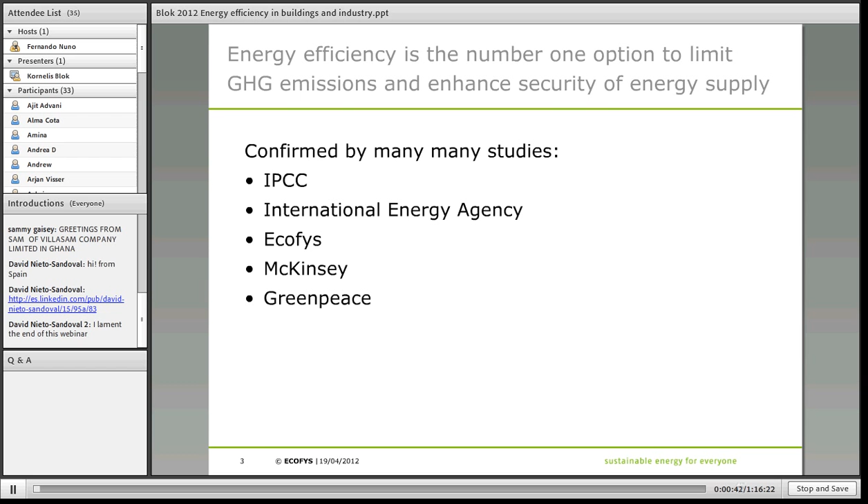If you are interested in energy efficiency in developing countries or energy efficiency in general, this is really a big topic. I cannot stop saying that energy efficiency is really the number one option to limit greenhouse gas emissions and enhance the security of our energy supply. That is confirmed by many, many studies.

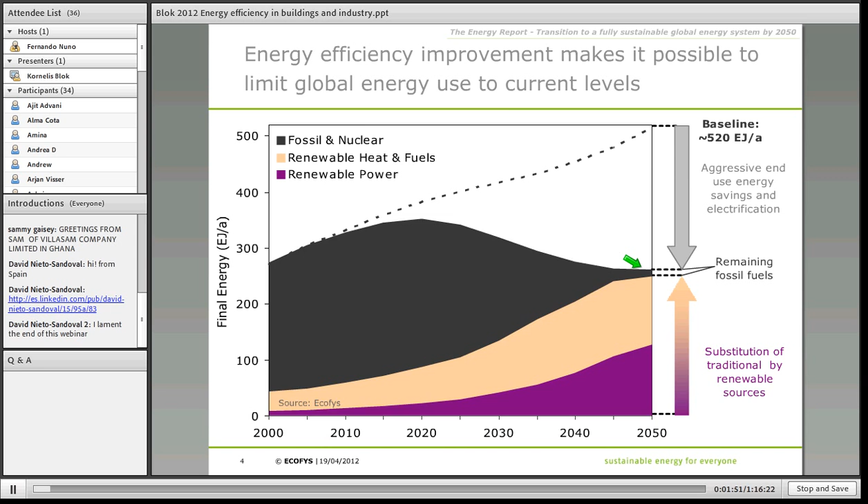But energy efficiency, although it is very attractive and everyone says it is attractive and the number one option, it does not come automatically.

A lot needs to be done to get it happening. In all the sessions that we had, a lot was already talked about what governments, what programs can do. Today I'll focus on the specific situation of companies around the world with an emphasis on developing countries, and I will discuss a number of topics.

First I will move into how we define energy efficiency. I will move to the topic of benchmarking, and at the same time present how energy efficiency is, or what the status of energy efficiency is, in different parts of the world. I will give an overview of energy use in industry and buildings, and then come to the main topics: energy audits and energy management.

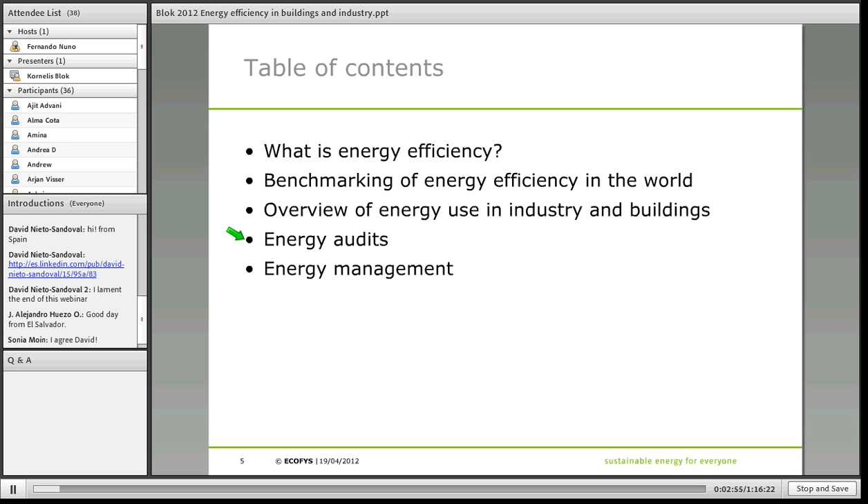So how do we measure energy efficiency? That's basically a very simple way, different from how you measure energy efficiency of a power plant or a boiler, where you measure energy efficiency by dividing output by input. Here you do it the other way around. When it comes to end uses, for instance in industry and buildings, we divide input by output. So we normally measure energy efficiency actually as the inverse of energy efficiency, and we call that specific energy consumption, which is the energy use per unit of activity.

That can, for instance, be expressed in megajoules per ton of steel, megajoules per square meter of office area, or megajoules per vehicle kilometer.

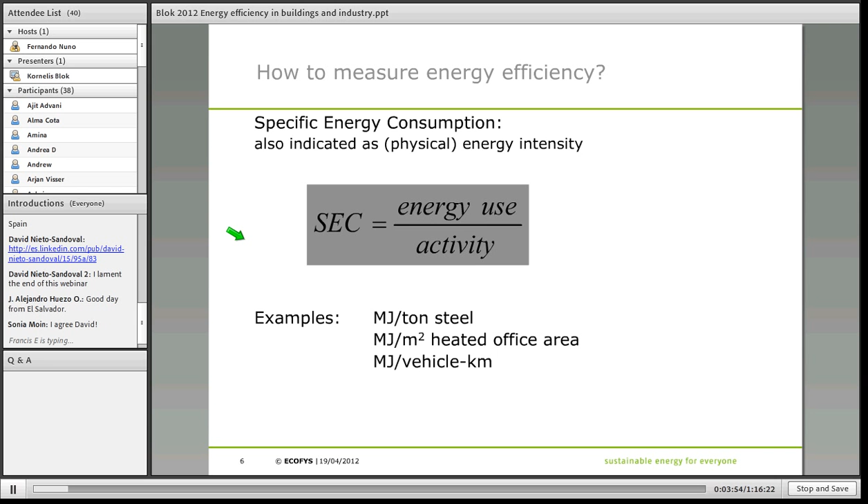Sometimes it's more complicated. For instance, if you have a fridge, you can measure its energy consumption in kilowatt hours used per liter per year. But if you have a fridge-freezer combination, it's more complicated, because it wouldn't make sense to measure energy consumption as kilowatt hours per liter, since that would depend very much on how much fridge compartment there is and how much freezer compartment there is.

So in this case we apply a weighting, and we say the volume is the refrigerator compartment plus 2.1 times the freezer compartment. That's the formula that was used in the European Union. But you can imagine that you can do that in many cases.

For instance, a company could make different types of steel: cold rolled steel and hot rolled steel. For cold rolled steel, you need more energy than for hot rolled steel. So then we use such a weighting system, and we call that the energy efficiency index.

The energy efficiency index is very much the same as specific energy consumption, but we use it in the case where there is a mix of different products or a mix of different activities. We do not care whether that's a mix of fridge and freezer compartment or hot rolled and cold rolled steel.

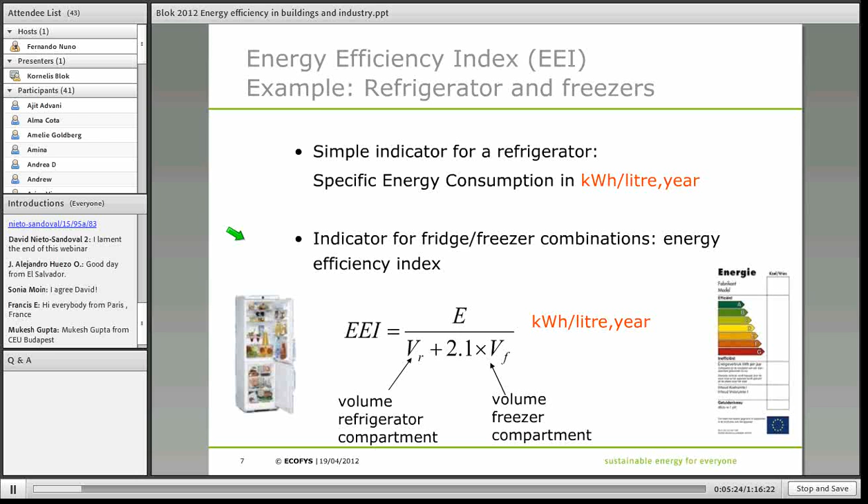What is then energy efficiency improvement? That's simply following up on the previous formula: reducing the energy use per unit of activity.

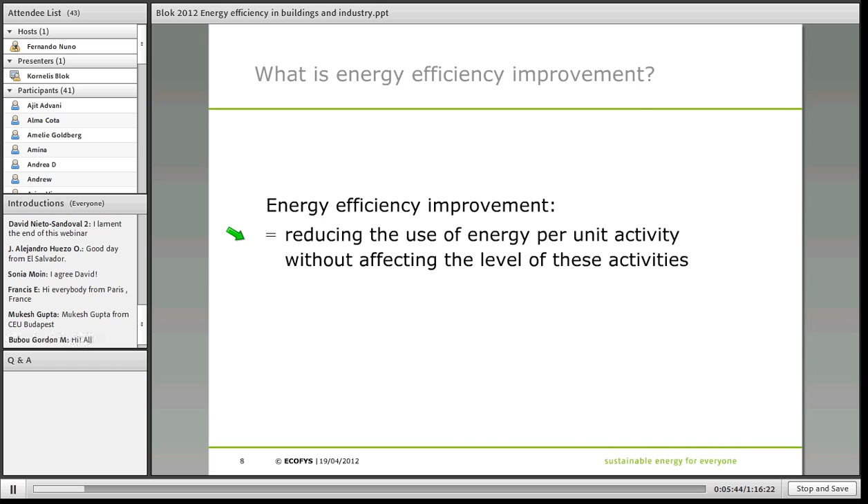One thing I always want to stress is that energy efficiency is not something new, invented 30 or 40 years ago during the first oil crisis. It has been with us for a long time already. This is the specific energy consumption for making iron in blast furnaces. 200 years ago we used 300 megajoules per kilogram of iron, and now that has dropped to about 12 megajoules per kilogram of iron. So you see a dramatic improvement in energy efficiency, measured as a reduction in specific energy consumption.

But the question on the table is: we see this automatic, autonomous improvement, as we often call it, of typically 1% per year. Can we speed it up? Can we go to 2, 3, or maybe even 4% per year?

So far for the definitions of energy use and energy efficiency. I will now move to the next topic: where is energy used for? I said we will look at two sectors, industry and buildings, more specifically service sector buildings. What do they use their energy for?

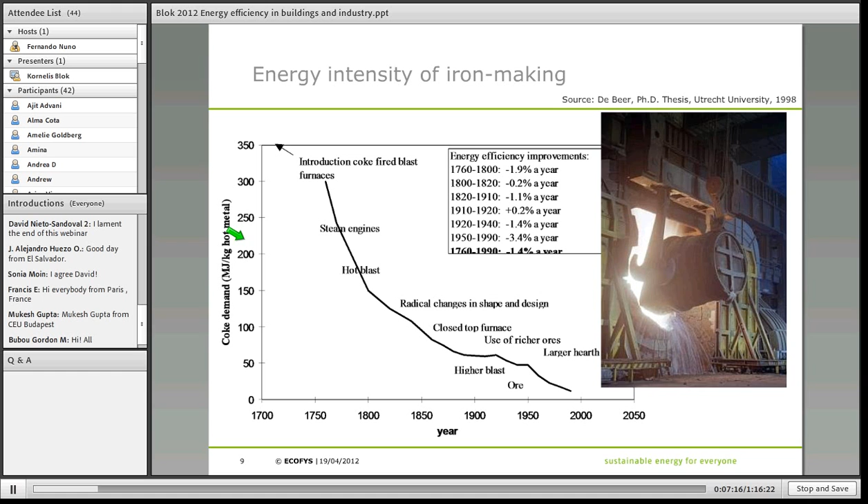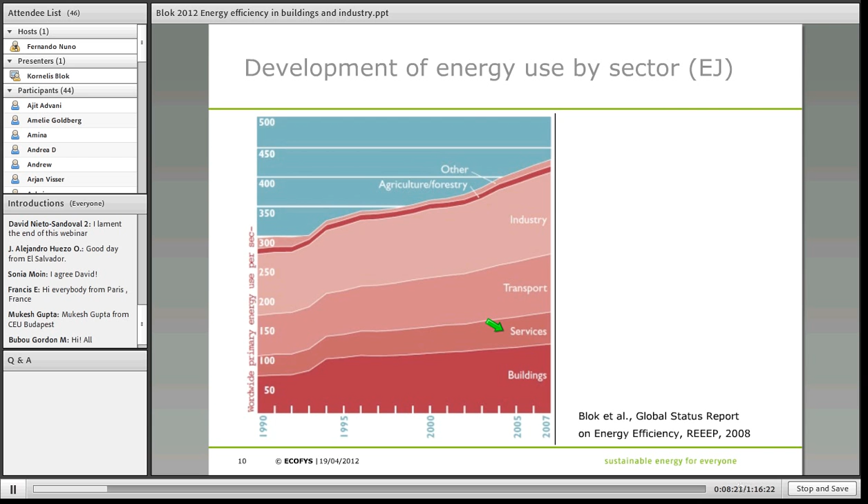So we look at these sectors, services and industry. Let's go a little further into the industrial sector. In this picture you see the breakdown of energy use in the industrial sector for both OECD and non-OECD countries. For industry, non-OECD countries already use quite a bit more than OECD countries.

For OECD countries, we see that chemicals and petrochemicals are very important. Iron and steel is also an important sector, but it doesn't have the share of energy consumption it used to have. Pulp and paper is very important. Non-metallic minerals is important, cement is the biggest there, and food and beverages. For the rest, energy consumption is spread across a large variety of sectors. That's always the difficulty when we talk about industry—energy consumption is so diverse. Every sector has its very specific production processes, and it's very difficult to find a common denominator.

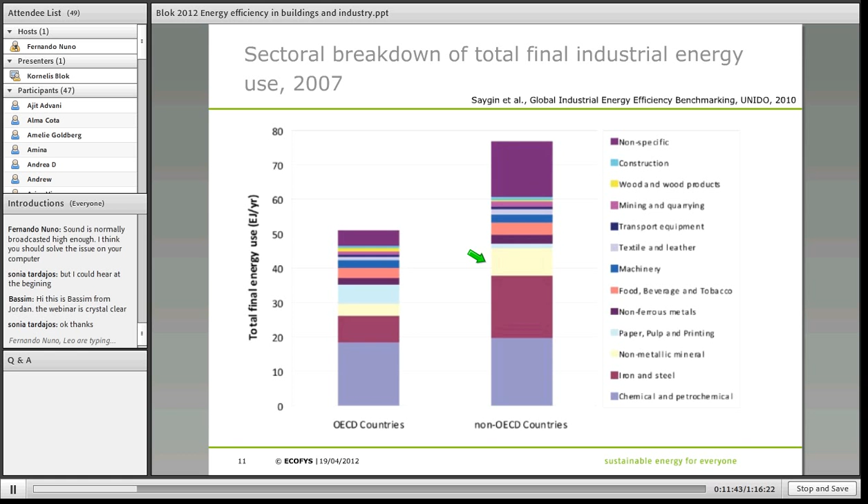So this is about the sectors where energy is used. That is relevant, but we can also look at what type of application the energy is used for.

We get a glimpse of that in this picture, which shows the breakdown of industrial energy use for the US. When you see pictures for other countries, it's often very much the same—of course the exact ratios differ, but you always see a similar breakdown.

When you look at electricity, the left chart in this picture, you see that motor systems—driving equipment through electric motors—take up the largest part of electricity use. In this case it's 52%, but there are countries where it's even 75%. That's an important one. Electricity is also used for process heating, sometimes because electricity is cheap, but also because it can be a very convenient heater. Electrochemical processes are important too—that's, for instance, chlorine production. Cooling and lighting take up smaller shares, as do facilities.

Having said that, it seems like there is quite some uniformity, because part of the energy is used for motor systems, but these motors are driving a large variety of different tools. So at first there seems to be uniformity if you see where electricity goes to, but once it's converted to power, it can drive all kinds of different equipment.

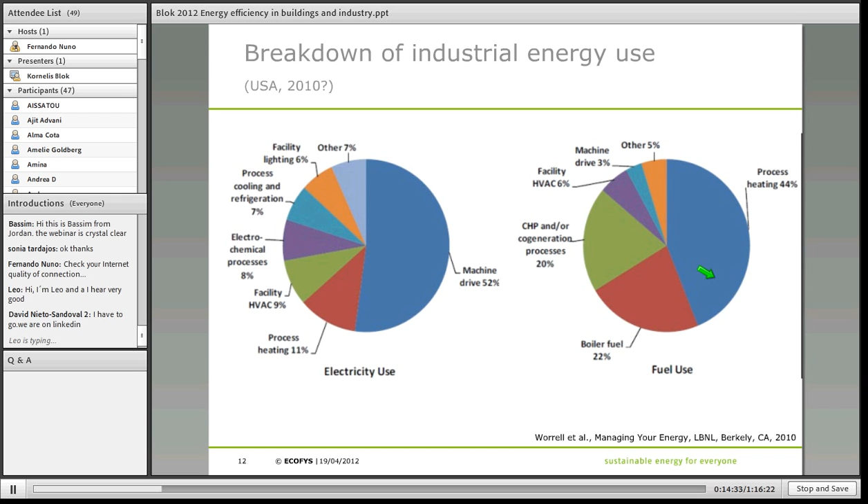The situation is quite different in the buildings sector. Here we see a typical breakdown of electricity use for a typical office building. Electricity use is responsible for a large part of the primary energy consumption, 50% and often more, which is different from industry, where fuels are responsible for a larger part of primary energy consumption.

In buildings, the services supplied by energy are much more uniform. Lighting is still very important. It used to be 50% or more in the past, but now it's typically still 1/3. This can also differ from country to country, of course, but it remains very important.

The newcomer is ICT, which can be central ICT systems and decentralized ICT systems, nowadays also very important. Air conditioning, so cooling and ventilation, are important categories, and then you have a number of other categories. For instance, in some cases restaurant facilities are important, internal transport, and pumps used for heating, ventilation, and air conditioning.

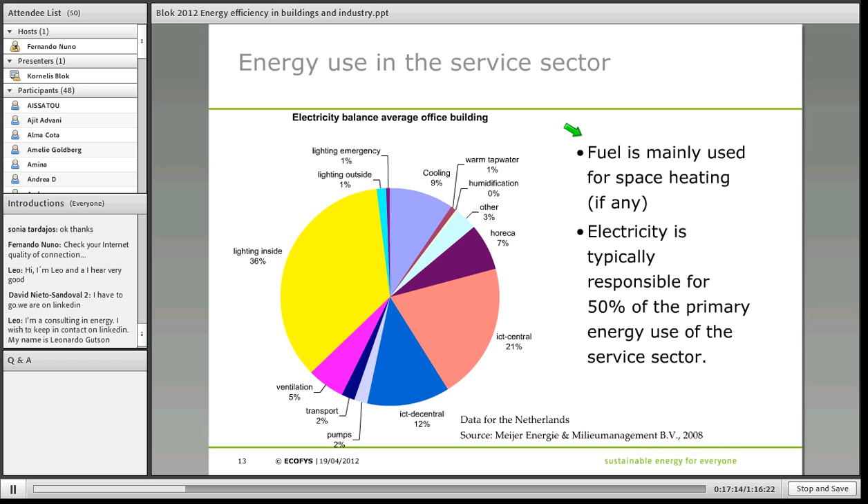And quite well defined. What is different in the service sector is that the interest in energy is much lower. Many industries are quite energy intensive, and that leads to quite some interest in using energy efficiently. Although I must say that's also only valid in the heavier industry types like cement, petrochemicals, and steel, and not so much in, for instance, machinery. But anyway, there is quite some interest.

That interest is often not the case in office buildings. An illustration of that is that in office buildings, often a large part of the electricity, but also fuel consumption, is used outside office hours. In this picture, it seems that it's lighting, and you often see such things—that in the evening when no one is in, the building is completely lit. But we have seen programs, and many people switch off the lights when they go home.

But in addition, there is a lot of hidden electricity consumption in buildings. There are pumps and fans that run day and night, and also in the weekends. There is ICT equipment and copying machines that stay switched on, etc. That is typically the hidden electricity consumption that no one sees, but that nevertheless can be responsible sometimes for more than half of the electricity consumption in the building.

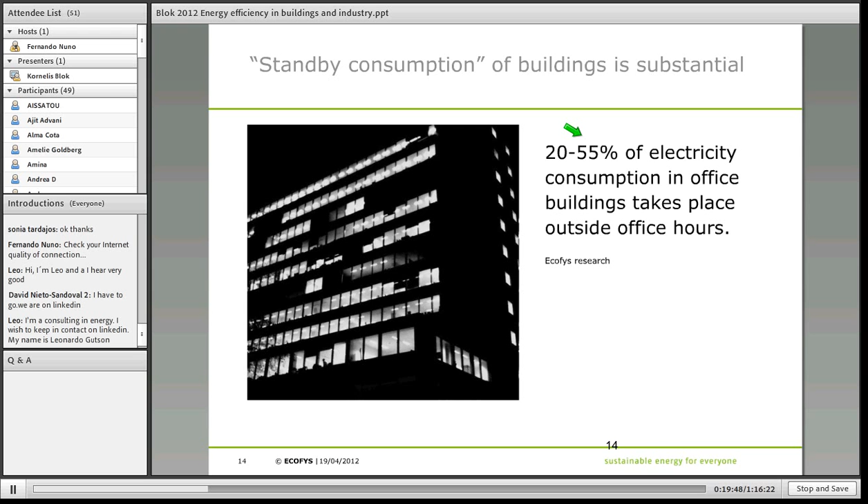The first tool I want to discuss with you is benchmarking. Benchmarking is a very simple tool. What you do is apply the formula I showed you before of the specific energy consumption, apply that to a number of companies, and compare them.

This is a benchmarking exercise for cement plants in Shandong Province in China. For 16 cement plants, the specific energy consumption was measured, described here by the energy intensity index. This has to do with the fact that cement is sometimes made from primary raw materials and sometimes from secondary materials, which have different energy consumption, so you apply an energy efficiency index, the same way as for fridge-freezer combinations.

So there's an energy intensity index, and the best plants operating in the world have an index of 100, or it's scaled to 100, and you see how these 16 Chinese plants operate. The best is about 20% higher, and the worst has 60% higher energy consumption than the world's best plant. This is very useful.

If you were plant number 12 in this list, you'd see there's quite some room for improvement—most of my colleagues nearby do quite a bit better than I do. So, not only for my competitiveness position, I must take a serious look at my energy consumption, because my best colleagues probably have 20% less energy cost than I have.

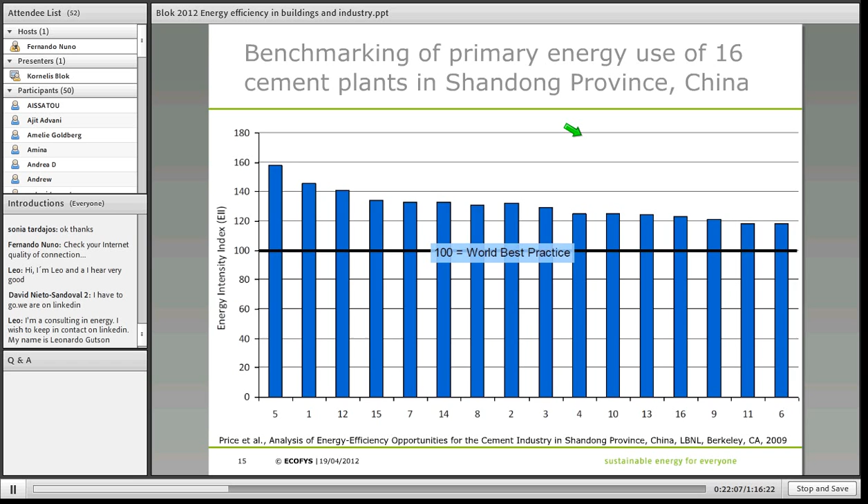What I'll do next is show you some examples of benchmarking across the world, to give an impression of the variation, and this is for copper. You see here a typical benchmark curve, with so many plants. This is not individual plants, but cumulative production, so there are small plants and big plants.

That's why the line is not very fluent. On the left you have the most efficient plant, using less than 8 gigajoules per ton of copper, and the least efficient use more than 20 gigajoules per ton, with some extremes using even more.

I don't know the explanation in this particular case, but you always have companies with exceptional processes that make them more energy intensive. For instance, I remember one company producing paper for banknotes, which required quite a different production process than common paper, and they had extremely high energy consumption. So you always have exceptions.

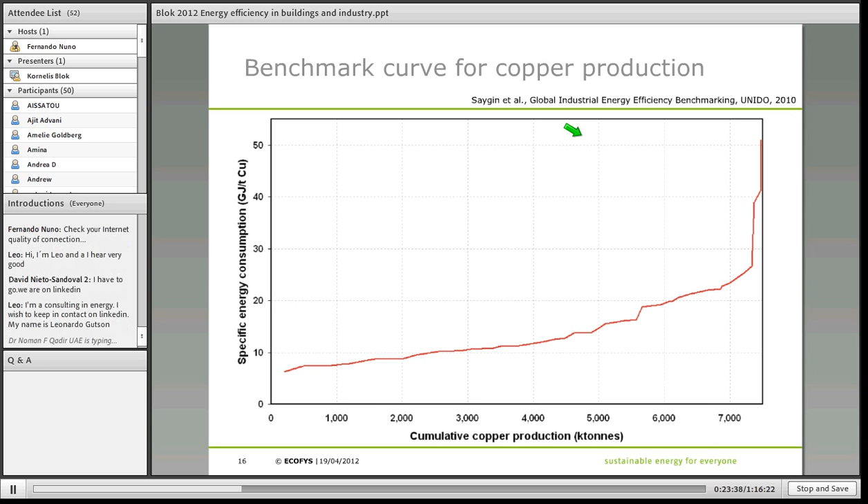In the case of copper, you didn't see the distribution across the world, but here you have a benchmark curve for aluminum. The red curve is for all the individual plants, and the black curve is similar but grouped by regions—so all plants in Africa are taken together, and the average is depicted here. In this case, Africa is the most efficient continent, then Asia, and the very last one is Europe. I started with this picture to make a point.

It is not always what you think. Many people assume developing countries are always very inefficient, and that we need technology transfer programs, CDM, NAMAs, to bring efficient technology to non-OECD countries. But this already illustrates that's not always true, and we see that in many other cases as well—in this case, it's exactly Africa doing best and Europe doing worst.

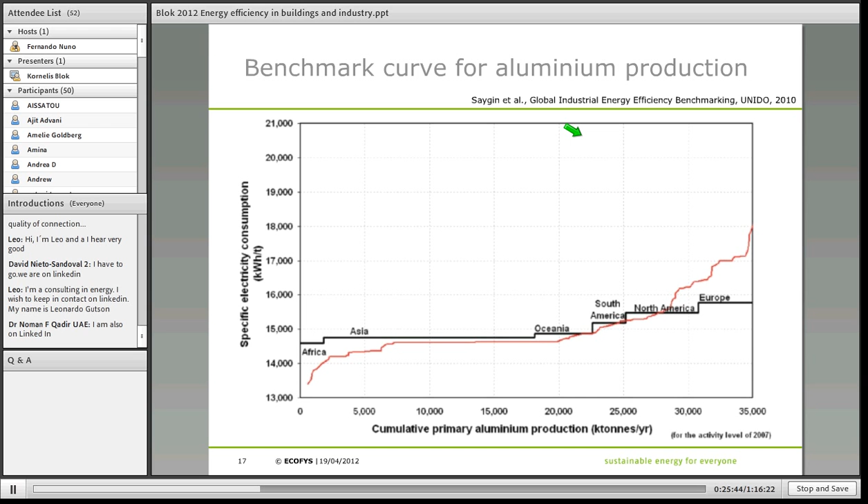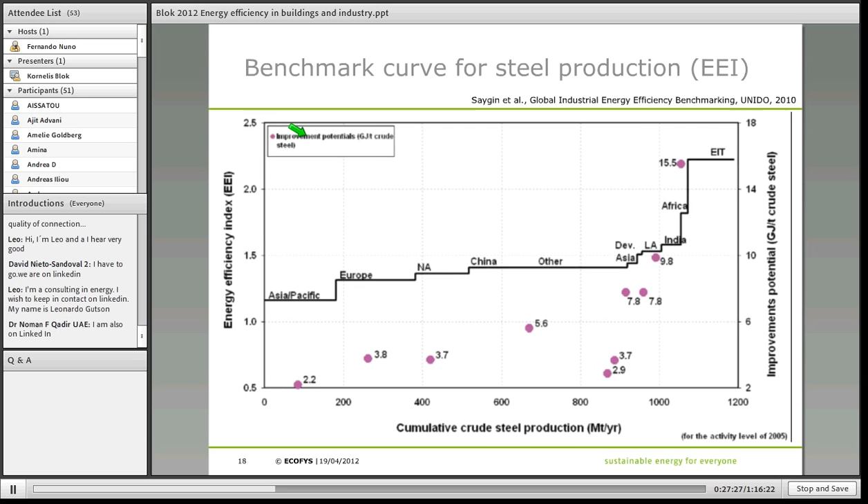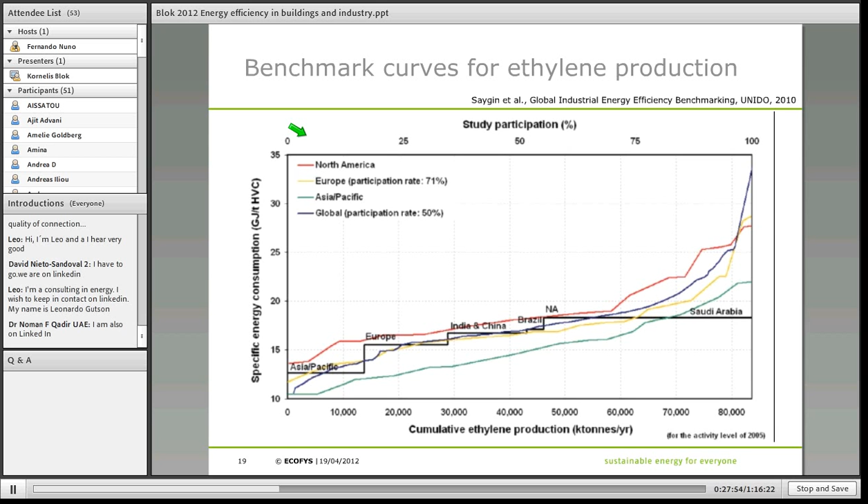This case has a lot of lines, but let's only look at the black line. Here you see this is for ethylene production, say petrochemicals, naphtha cracking. Also here you see that countries in Asia are doing very well. Europe is second. And then you get the other regions.

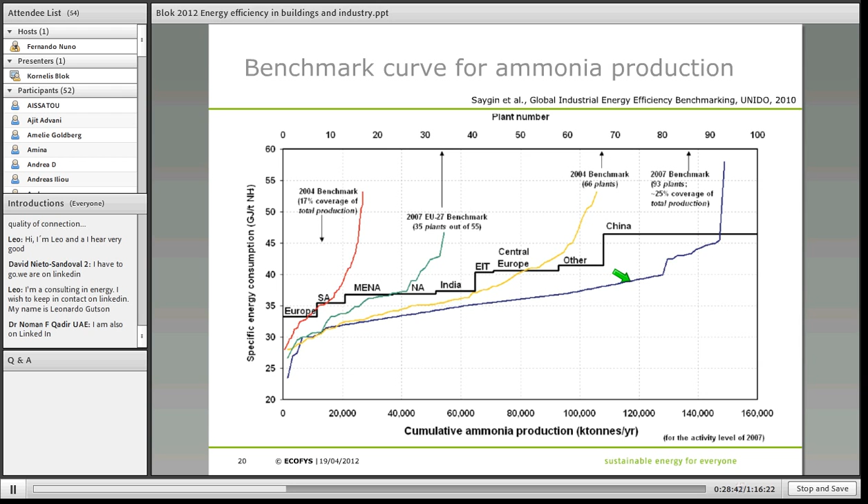This is ammonia. Again, in this case, Europe has the most efficient ammonia production, but you see all other regions - South Africa is doing quite well, Middle East, India. China is relatively inefficient for ammonia, and that has to do with the fact that in China there is a lot of coal-based ammonia production, which is inherently less efficient than natural gas-based, as is the case in many other countries. So you see a very mixed picture - you cannot say certain regions are better than others.

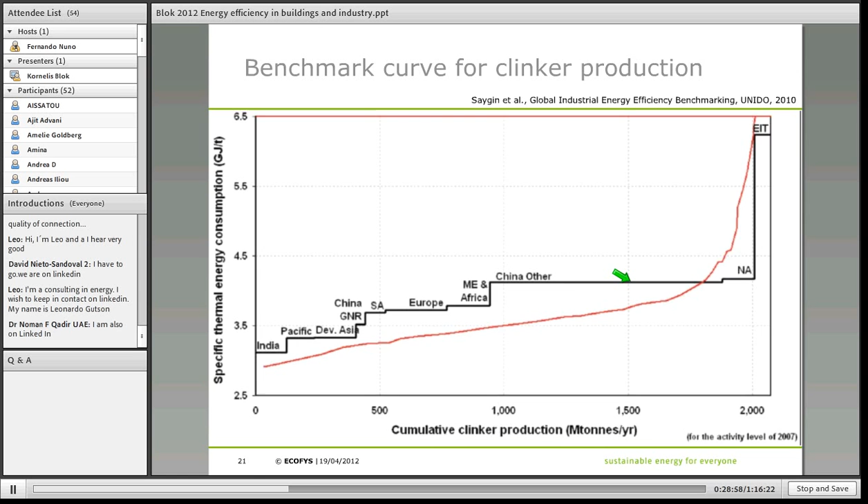These pictures were compiled for UNIDO by colleagues of mine at Utrecht University. They took all the information available at present, with a disclaimer I already presented before. In general, if you look at the entire world, the message should be: there are no particularly efficient or inefficient countries.

Roughly speaking, Japan, Korea, and European countries often are among the most efficient in the world, but not always. For the rest, it depends very much on which sector you look at. The US often is not so very efficient. China used to be very inefficient but is catching up rapidly, and Russia stays a relatively inefficient country.

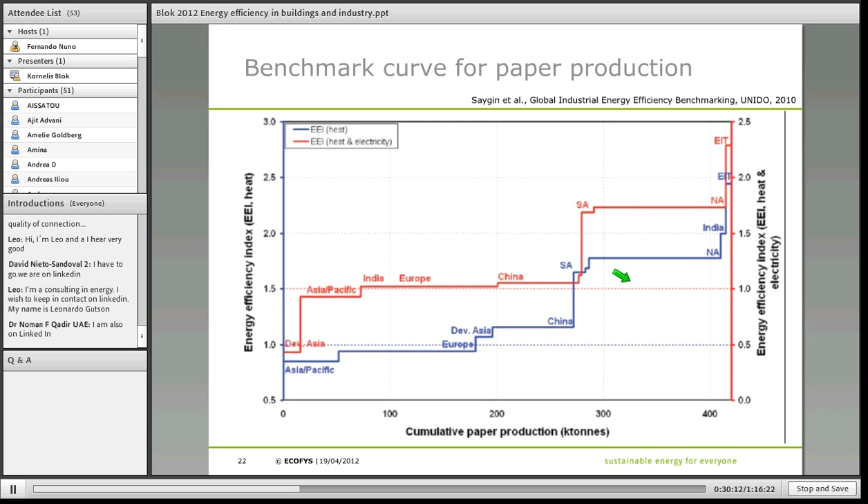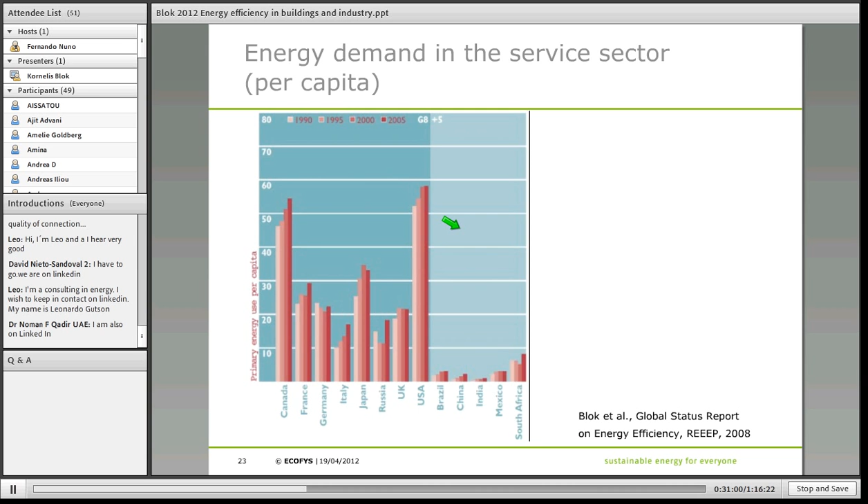Okay, so far this hopefully gives you a picture of where we stand internationally.

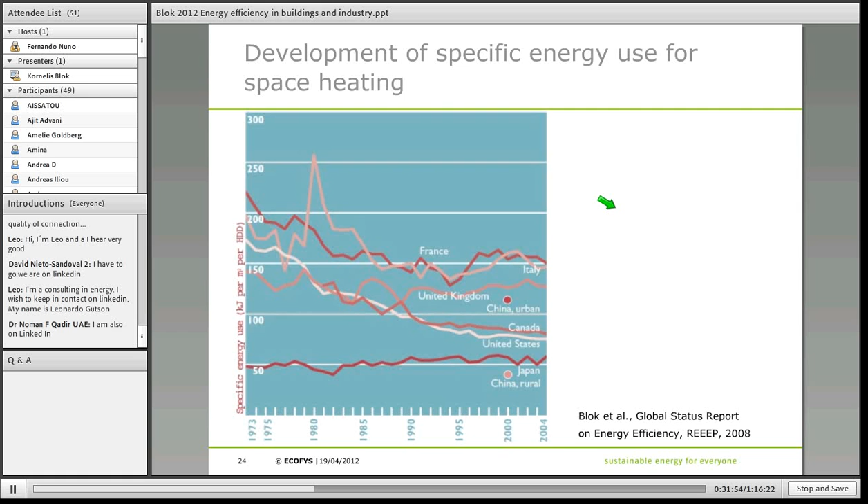Let us now move to energy audits. Energy audits are very often mentioned and often considered a very good solution for making companies work towards energy efficiency. That is to some extent true, but there are two requirements: first, you need to do good energy audits, and second, standalone energy audits often do not make much sense - you need to embed them in a larger process.

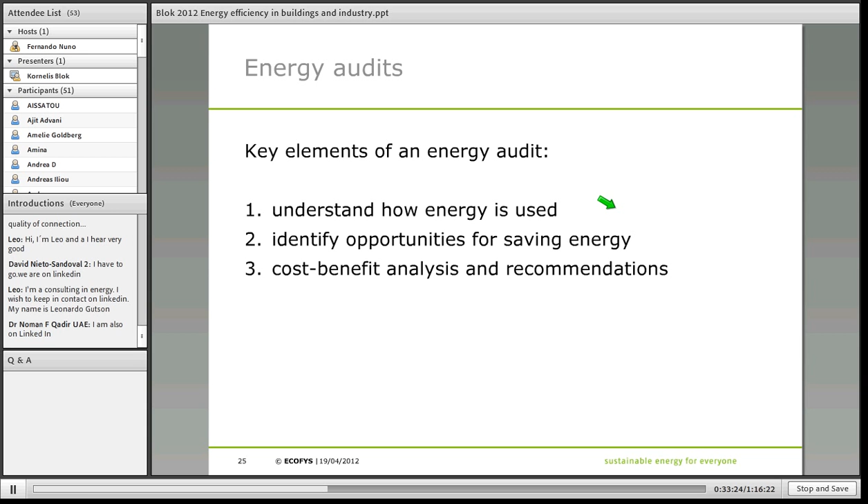So what do you do in energy audits? Here the three main elements are mentioned. First, you need to understand - you go to a company or building and need to understand how energy is used there. Second, you identify opportunities for energy savings, which for me is a synonym for energy efficiency improvement. Finally, you do a cost-benefit analysis, and on that basis you can make recommendations for a company or organization on what to do. Let us have a further look at these three elements.

First of all, you need to understand how energy is used, and often you apply a certain procedure for that. You first start with looking at the total energy use, and the simplest way is to look at the energy bills.

Because that may often not be for one year, but for a number of years, you see how much energy is used. Is there a change? Is there a variation? What is more important, electricity or natural gas or coal or other energy carriers?

Second, you go into the company and you make a registration of all the energy using equipment. That can be boilers, motors and other equipment. You can see what's the capacity, the power that the equipment uses. You can make estimates, often on the basis of what the people in the company tell you about the operation time. Is it used only permanently, or only at daytime, or irregularly?

What is also very important is that you determine the thermal characteristics of the buildings, because especially when you talk about space heating, which is an important energy use factor, or cooling in buildings, that's to a large extent determined by how well the building is insulated, what the K values are.

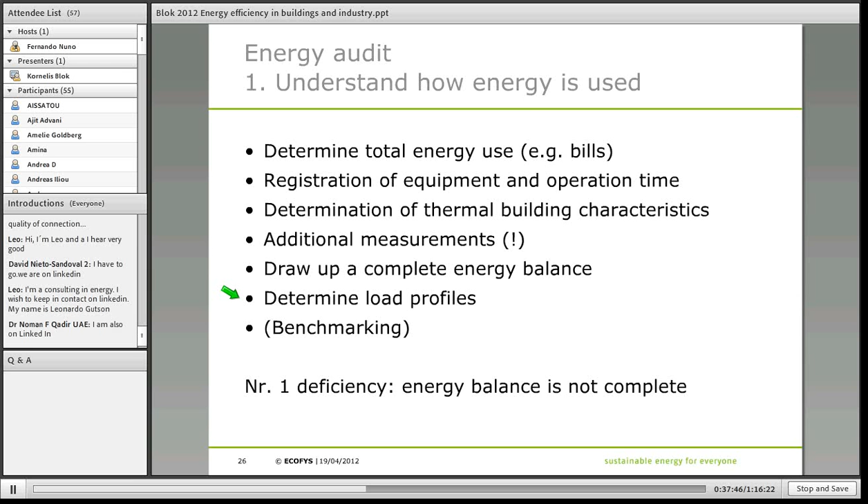And what also could be an element then is that you apply benchmarking. If these data are available, it's good to compare your specific situation, your company or your office building, to others, to see where we stand, because that gives you a first indication of whether you have a big savings potential, or would expect only a limited potential.

Okay, the second part is to identify opportunities for saving energy, and there is a large variety. Basically you can already tell from my introduction, where I said there are so many different industrial sectors with all different processes, that especially if you work in industry, no two energy audits will be the same.

But you can make a certain categorization. First of all, you have generic building-related measures. As I already said, in office buildings energy consumption is relatively uniform. Although I've never seen two office buildings that are completely identical, you have the same set that you always can apply. You talk about insulation, different types, walls.

Floors, roofs, glazing. You need to control ventilation, see whether there is a lot of air leakage. You need to look at lighting, more efficient lights, high frequency control of lights, switching light on the basis of presence or daylight. You can apply condensing boilers or heat pumps.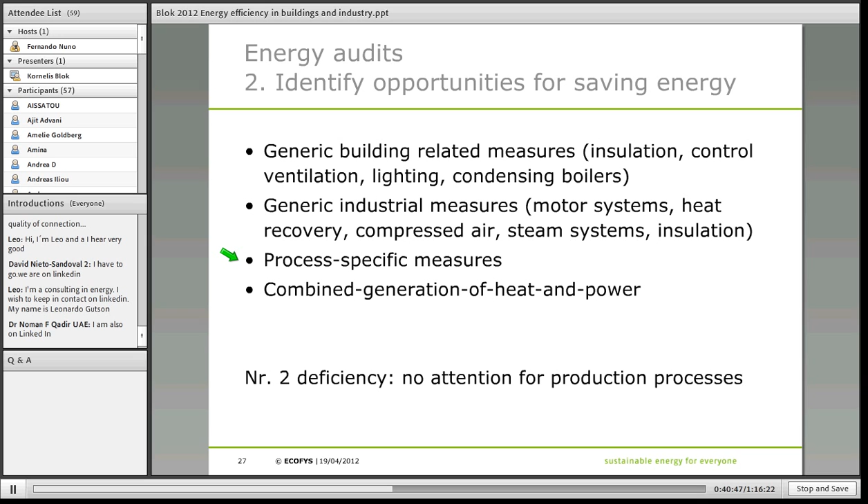You should also look at the heat supply and see whether combined generation of heat and power is attractive. But I think these process-specific measures represent deficiency number 2. If deficiency number 1 is that the energy balance is not closed, number 2 is that only attention is paid to generic measures, or maybe generic industrial measures, but real process-specific measures are not taken into account, and that also overlooks a substantial part of the potential.

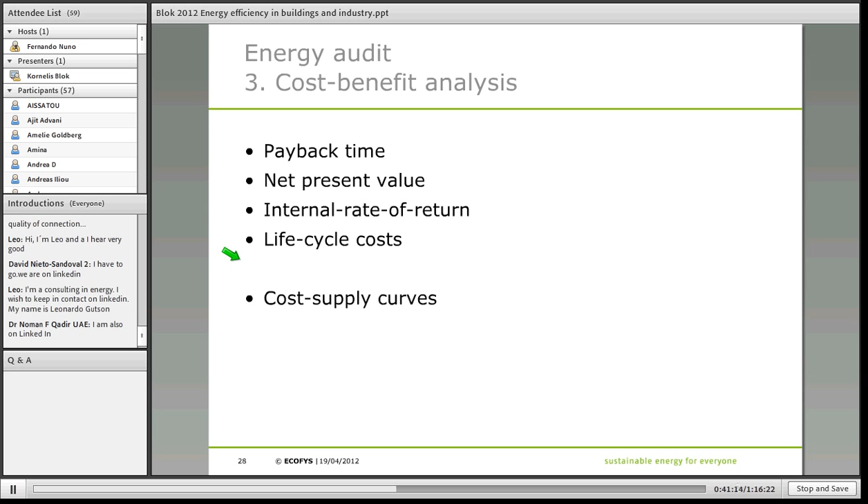The final step, once you have made the inventory, is to do the cost-benefit analysis: determine the payback time of the measures, or other indicators like net present value, internal rate of return, whatever is more common in the industry that you look at. An additional possibility is to look at cost-supply curves.

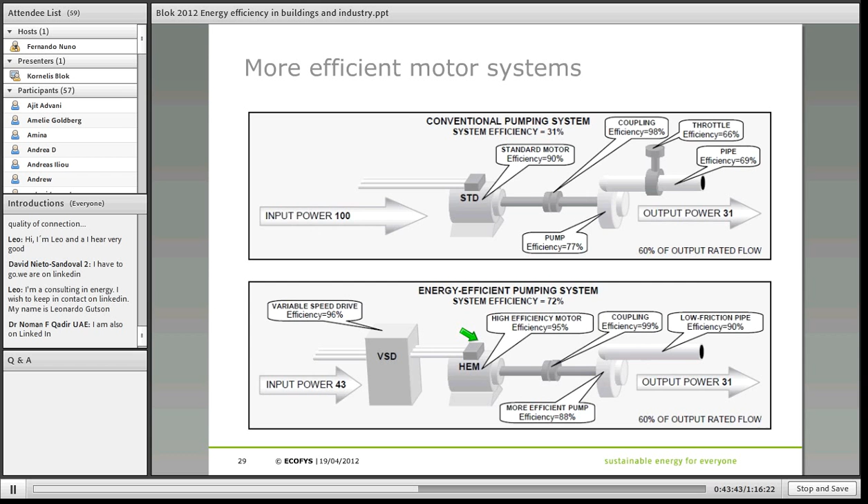The second thing you do is apply a high efficiency motor, which delivers a substantial improvement, and then there are a number of other measures. You can improve the coupling, have a more efficient pump, and have lower friction pipe. You can also look at the further system, because this pump delivers liquid flow to something else, and there may be possibilities there too. But in this case, the variable speed drive is measure number 1 and the high efficiency motor is number 2. This whole package is considered a more efficient motor system. In most studies I've seen, you see conservation potentials of more than 30% in motor systems.

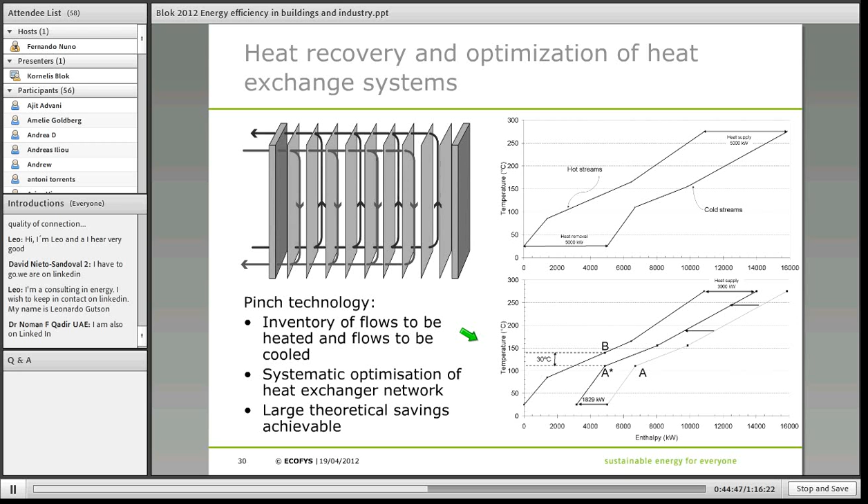Another important option is heat recovery, and more generally, optimization of heat exchange systems. I won't go into detail, but you can apply an approach called pinch technology, and to the right you see some pictures that illustrate it, though it would go too far to dive into the details. What you do is make an inventory of all the heat flows in the process -- the heat flows that go into the processes and the heat flows that leave them. With the help of pinch technology, you can design an optimized heat exchanger network, and in many cases huge savings are possible, say 50%, sometimes even 80%, but at a cost -- sometimes the investments can also be substantial.

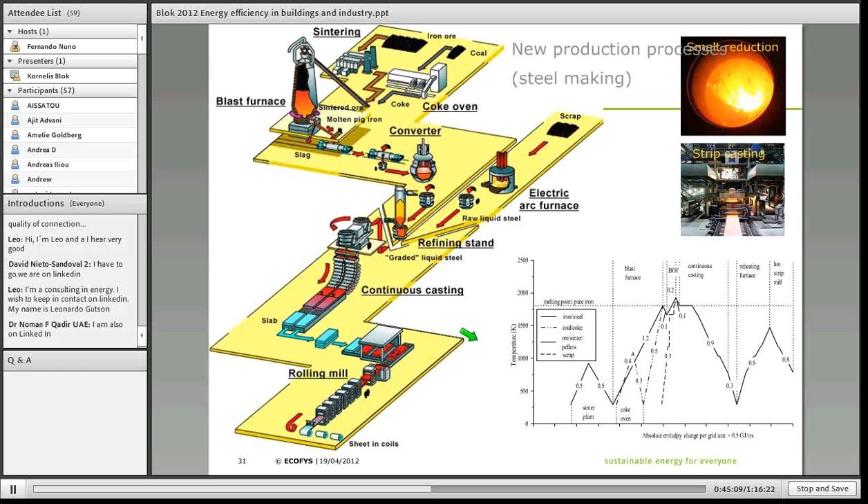This is an example from the steel industry, with very specific processes. There's nothing like that in other sectors, and I would say only if you are a specialist in iron and steel making can you do a good energy audit of a steel mill.

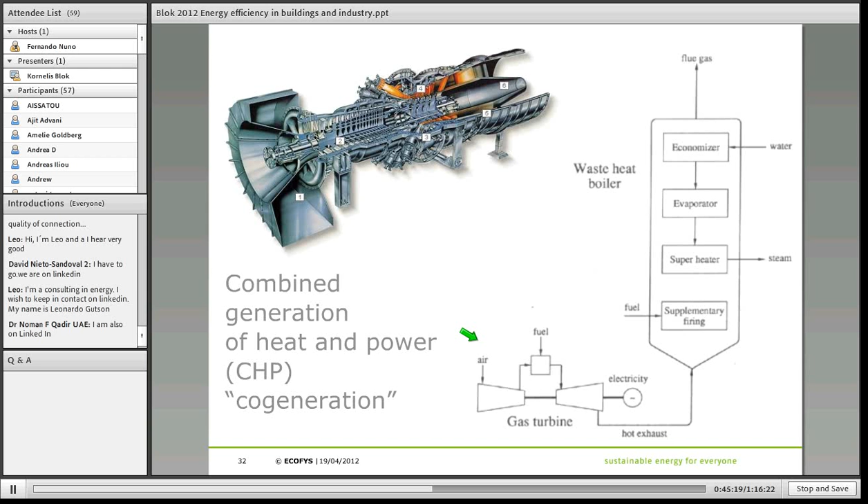Combined generation of heat and power, I will skip that briefly. This is gas turbine cogeneration -- if that is available, it's by far the best solution. But many countries only have coal, and then you can have a steam turbine-based system.

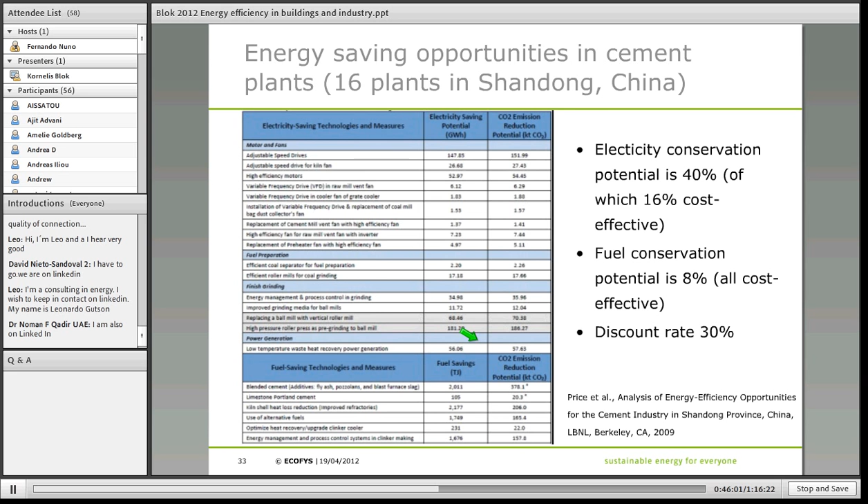This is an example of an inventory of all the energy saving possibilities for the same 16 plants I mentioned in China. You see, in this case, a conservation potential for electricity of 40%, of which 16% is cost effective even at a discount rate of 30%. Fuel conservation potential is 8% in this case, so somewhat more limited, which is often the case for cement.

What is very useful is a cost supply curve. You're probably familiar with cost supply curves, nowadays often called McKinsey curves, but these are much older -- I made my first cost supply curve back in 1990. What you do is measure the cost per ton of avoided CO2.

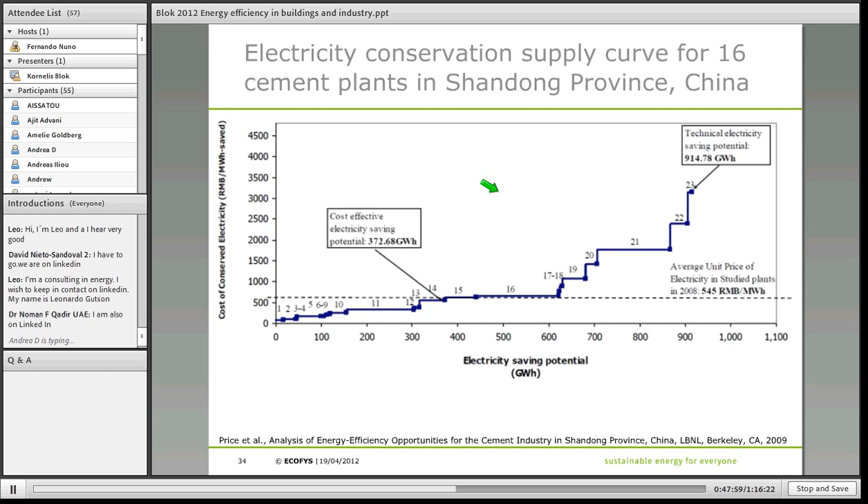So the final point. There's something similar for fuel. The final point I want to make: energy audits are good, but let me stress, energy audits...

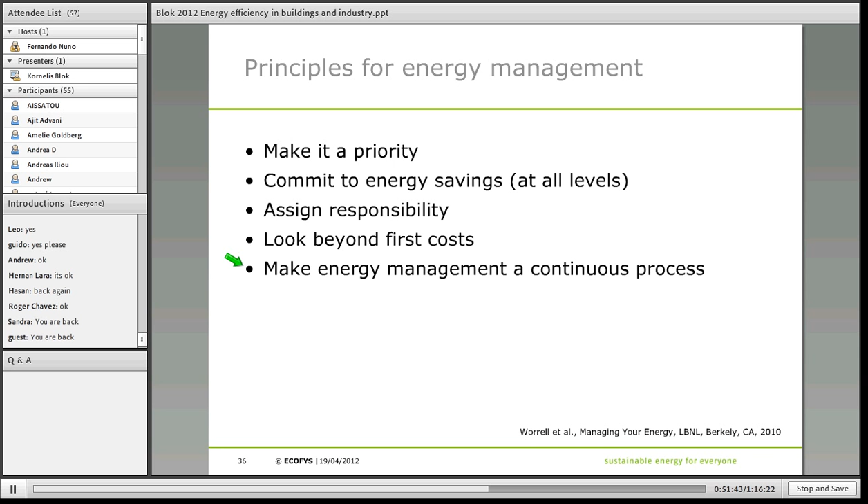It doesn't work if you do not want to invest. You can have first savings that are virtually free, good housekeeping type of things, but at a given moment you really need to invest. And as I already said, it needs to be a continuous process. That's all, and that is depicted in the following slide.

It starts with making a commitment. You need to assess where do we stand, and basically here the energy audit comes in, and then you should set goals. You make a plan of several years to reduce the energy consumption or improve the energy efficiency. You create an action plan, you implement it, and after some time you evaluate it, you recognize achievements, and you start the cycle again. And now and then you also need to do a reassessment of the whole thing.

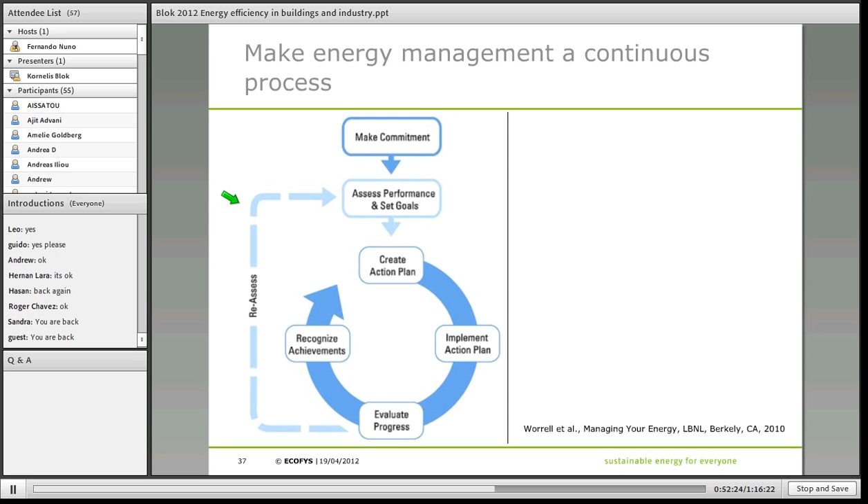And then what are the elements of energy management? Then energy audits come in. If you have this embedded in such a structure, then energy audits can be very effective because then you really need them. You really need good energy audits to make good plans, to make the right investments.

You need to make teams of people responsible. It doesn't work without employee awareness. And last but not least, you need to have good monitoring in place. When you start an energy management program, you often have limited data.

Many buildings nowadays have a building energy management system, but they're only used to control the buildings, just to make the settings - what temperatures do I want to have, what flows. But you can expand the building management system to an energy monitoring system, so that you get information on how your building performs. And the same for industrial processes.

Last but not least, I would say not only should you give people assignments - what should they do - but you should also give them incentives. What works very well is that many companies have a system where the salary depends on performance, and you can put energy elements into that.

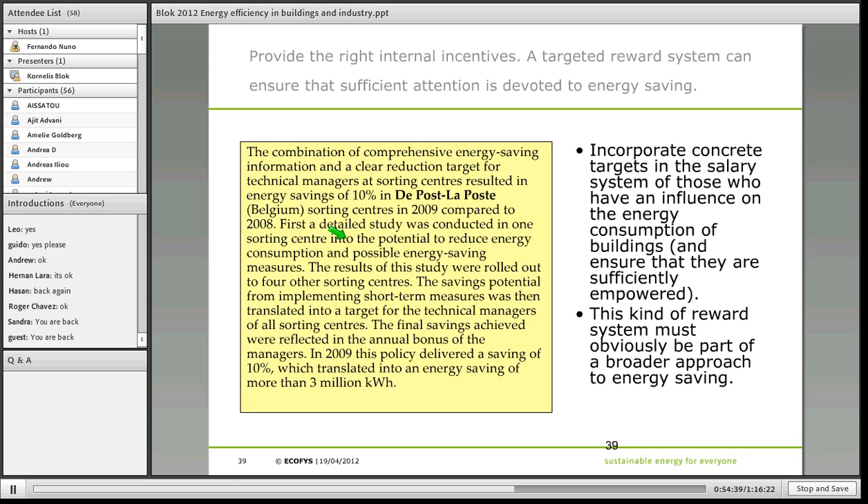So this is good stuff for further reading, I would say. Okay, thank you very much for your patience and attention.

Okay, great. Kornelis, thank you very much for this interesting presentation. So from now we invite our audience to submit your questions. In the meanwhile, maybe you can give us a few more ideas on all these tools you presented on a practical basis. Do you find any concrete application in any particular country? Do you have any experience having applied any of these tools for advice to governments or in the definition of energy efficiency policies for any country?